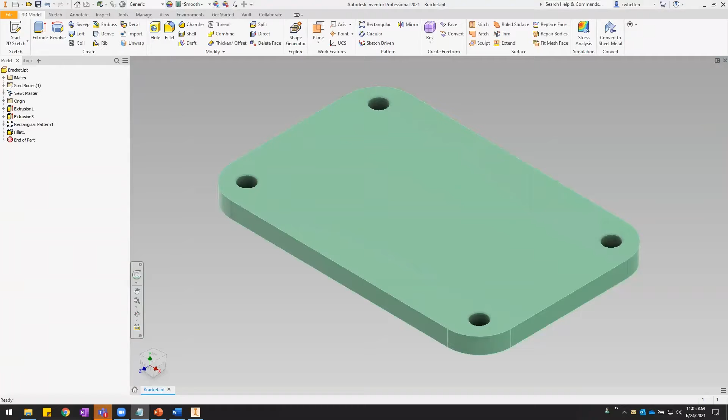Okay, so what I've got here is just a simple little bracket that's got some iLogic rules in it to change the size. So it can either be small, medium, or large. As it changes, you'll see the length Z and the length X and the thickness have different values. And what I want to do is I want to have the description display the values of the thickness and the two length parameters as part of the description. And what we're going to do is we're going to write an iLogic rule to automate that description for us.

There's a number of ways you can do that. Obviously, you could export your parameters and use a custom property formatting and that sort of thing. But for today's purposes, we're going to use an iLogic rule to generate our description. So we'll start a rule. I'll just call it description because that's what it's doing for us. And this is a pretty simple thing. We just go into our snippets, go iProperties. There's one for description right there. We just grab that. And then we're changing that.

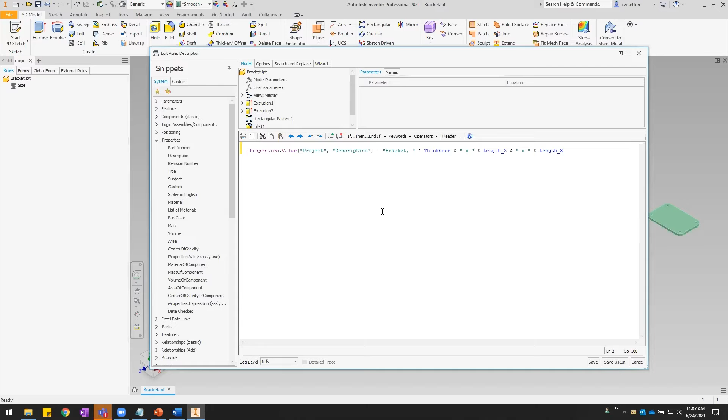We want to set that equal to, and I want to call it bracket. And then I want it to include the value of the thickness parameter. So I'll just put that parameter value there. And then I also want to include the length Z and length X. There we go. Okay, so pretty simple formula. We just save and run that. Go check out our description, our iProperties, and you'll see now it says bracket 0.5 by etc.

Okay, so now let's say we actually want to, instead of just displaying the raw values for these parameters as decimals as they are here, let's say we want to actually format those to be like fractional inches. And again, there are many ways of going about this.

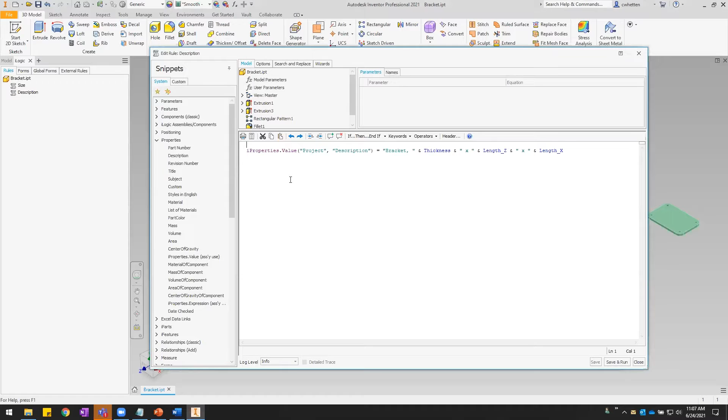One way would be to use the custom property formatting in the parameters dialog, but we're going to just do that through our iLogic rule. And to save some time, I've got a bit of code that I've written up that basically takes that decimal value and formats it as a mixed fractional string. So I'll just copy and paste that code here, and then we'll just talk about it real quick.

We take this value that we want to round, in this case the thickness, and then we specify a rounding increment. So basically to the nearest 1/8 of an inch is what we have specified here. And then this little bit of code down here just takes that decimal value, extracts the denominator and the numerator, does some rounding and dividing, uses the mod function, and then basically builds a string that's a mixed fraction of that. And then we want to take that value as a mixed fraction and use that inside of our description instead of just the raw decimal value.

So I'm going to take that, Control C, paste that there. So I'm going to use that in place of the thickness. So now we're still using the thickness that's being fed into this formula as the value to round. Formula goes through, rounds it, converts it to a mixed fraction string, and then we're going to take that mixed fraction, write it into our description.

Okay. I don't want to spend too much time over that code because that's not really what we're talking about today, but I'll just go ahead and save and run that so you can see the result we get. I'll pull up our description, and there we go. So now instead of 0.5, it now says 1/2. So we want to do the same thing for these other two values here. So let's go back into our description rule.

And one way we could do that is, okay, so we've done this for the thickness. Now we need to do it for the length Z. So we could just take this whole block of code, copy and paste, and then change this to our length Z or length X or whatever. That would be one way to do it. Obviously, it's just going to take a bit more manipulation in order to get this to work, because you'll see we're dimming value to round here, and then we're dimming value to round here. We can't declare two variables with the same name.

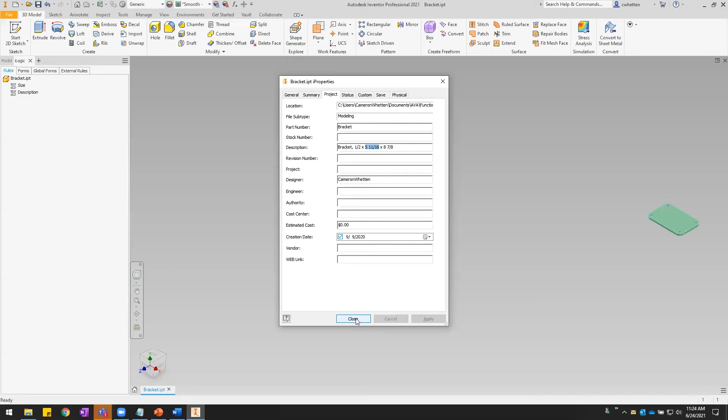All right, we have a few questions here, Cameron, before we move on. One person's asking, does the function always have to have the data type at the end? Whenever you call the functions, it ends with like as string or as decimal—is that always a requirement when you declare functions like that? Yes, when you declare a function, it has to have a value type. It doesn't actually have to return a value, but it does have to be declared as a type.

And this is a great question, it's getting into what we're going to talk about next, which is subroutines. A subroutine is basically like a function, except you don't give it a type at the end because it does not return a value. Interesting. Okay, and we'll talk about that next.

And just to head off this question as well, someone's asking: can you establish a library of functions and subroutines for all sorts of people to access? Yep, these are great questions, we're going to talk about that. We're going to talk about external rules, which is exactly what you're talking about. Thank you.

Okay. All right, go for it, man. Thank you. Okay. All right.

So let's talk about subroutines. I've got a different assembly here, one of the sample sub-assemblies you can download for Inventor. If you go to Get Started and hit Open Samples, it opens a web page with different samples you can download from Autodesk, available for different versions. This is a 2021 example, and it's got a whole bunch of iLogic rules and stuff in here.

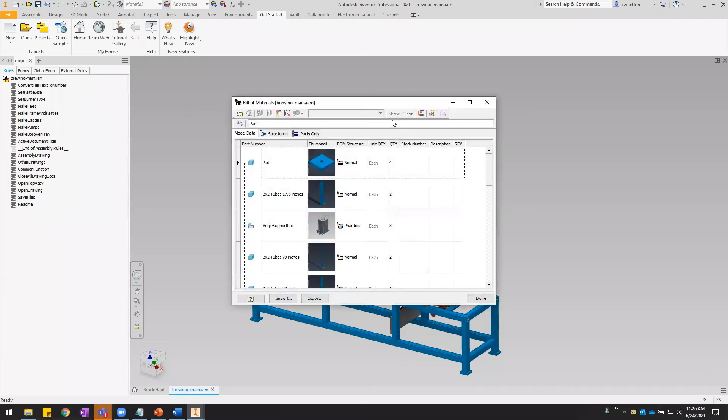But what we're going to do for this one is I've got this assembly, and I'm going to open up the bill of materials. We'll flip through here real quick and see there are several components that have their BOM structure set to reference, and even inside some sub-assemblies there's a couple components set to reference.

What I want to do is write a rule that goes through this entire assembly structure, from the top all the way down to the lowliest part, and basically remove all of those BOM structure overrides so they're no longer set to reference, they'll be set to default. We're going to use this as an example of how to use a subroutine, and we're also going to start talking about recursive subroutines.

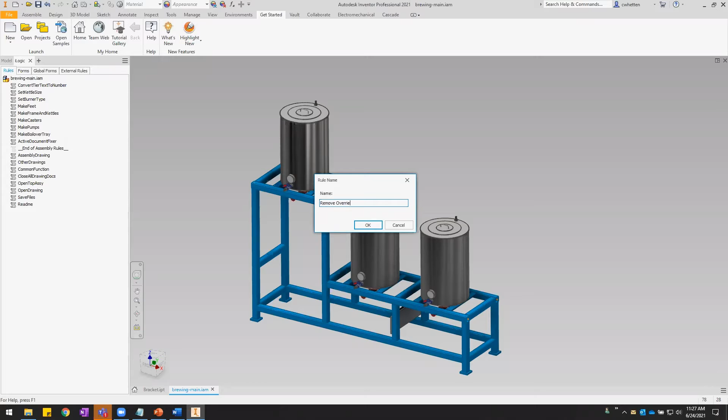So let's just call this remove override - not a great name, but we're going quick here. So, all right.

What we're trying to do here is write a rule that is going to set the BOM structure of all of the components to default. And that's a pretty simple thing to do.

Basically we're going to use a for each to loop through all the different components in this document. I'm going to dim up the assembly document, just for convenience. But really what we're getting at here is we're going to do a for each loop and go through all of the component occurrences as component occurrence in this assembly doc.

Component definition dot occurrences - so all the occurrences in this assembly, we're going to flip through each one of them and set its BOM structure. Comp dot BOM structure, set that equal to BOM structure enum dot k default BOM structure. So a really simple loop that goes through all the component occurrences in this assembly and sets its BOM structure to default. That'll remove any of those reference overrides.

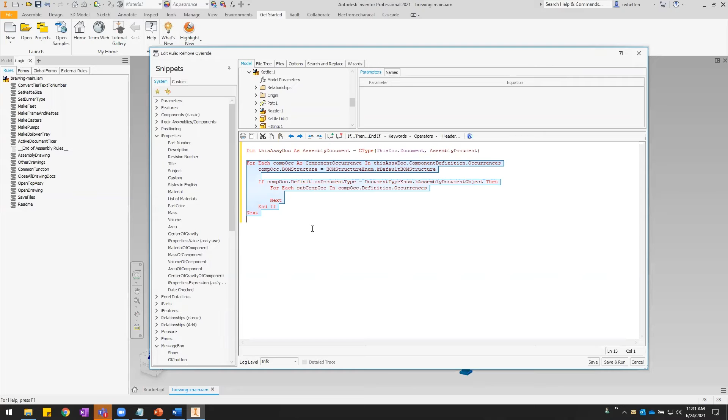Instead, what we want to do is take this function, or this bit of code that loops through and sets the BOM structure, and set that as a reusable chunk of code we can call as many times as we need, just like a function like we talked about in the last example. But in this case, all we're doing is setting the BOM structure. We don't need to get a value back, we're not trying to get some mixed fraction string or anything, we're just performing an action. So we don't need a value back. What we want to use instead is a subroutine, which does not give us a value back. Okay, let's go ahead and set that up.

Just like for the function, we go down to the bottom of our code and declare our subroutine. You use the keyword sub, then give it a name: set default structure, and then pass it any values. You don't have to pass values if you don't need to. If you were just, say, displaying a message box, you don't need to send it any values or get any values back. Then that would work just fine.

But in this case, we are going to be sending it the value of which assembly to loop through. So we need to create a variable here for our assembly document. Let's do that. Because we're doing a sub and not a function, we do not declare a type. That's the difference between a sub and a function: a function, you have to declare a type and can send a value back through that. A sub, you do not declare a type, and you can't get a value back from it.

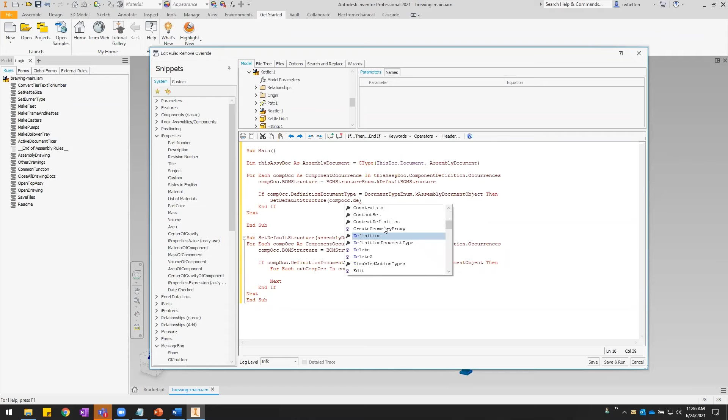So instead, we're going to just call this function now. And the way we do that, just like before, we just call the name of the function. So I'll copy and paste that there. And then we're going to send it the subassembly document. So in this case, that's going to be the component occurrence that we're actually looping through at the moment. We're sending it the assembly document, not the occurrence, so we want to make sure we get the document from that. And the way we do that is go to the definition and then document.

Okay, so now when we run this bit of code, it's going to loop through all the components in the top level assembly and just set it to default BOM structure. And then check, okay, is this occurrence that I'm currently working with actually an assembly? If it is, then we're going to go ahead and run this subroutine, and we're going to pass it the document that represents this current component. Then, because it's an assembly, it's going to loop through all of the component occurrences inside that subassembly and set their BOM structure to default. Okay.

So again, if we just left it at that, then that's going to go through the first level and then the second level deep, and that's it. And if we wanted to go multiple levels deep, we were talking about, oh, we can nest for loops. We don't want to do that. And we got around that here by actually just calling our function. We can do the same thing here. If we want to go into subassembly levels below this subassembly, then we can just call this function again, right? And that's what's called recursive. We're making use of this recursive function. It's called recursion. It's basically the subroutine calling itself, right?

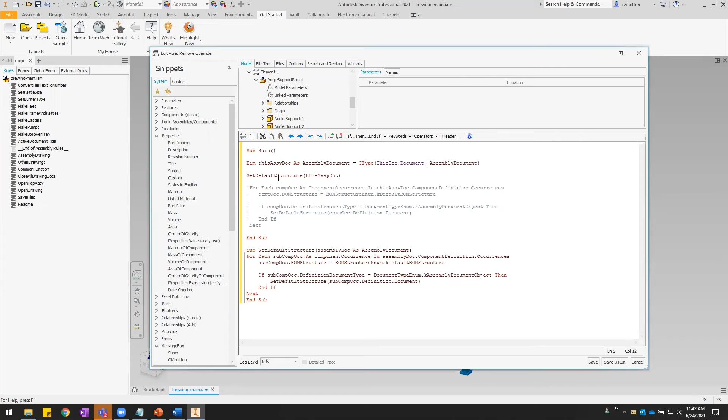So that's exactly what we were doing before, right? But instead of repeating and rewriting those same lines of code, we're just calling that same function, running it through with this assembly doc. It's going to run through, find any subassemblies, throw them back into the subroutine, and just run it over and over again. So we're using the same function over and over again, but at each level of subassembly deep, we're passing it that subassembly instead.

And so it has the effect of just kind of drilling down through the subassembly structure and hitting every component occurrence in the assembly structure that way. Oh, that's pretty neat. Yeah, this recursion is really powerful. It's kind of an abstract concept, and hopefully I've done justice in explaining how it works here. But it's really powerful to be able to do that.

Right. And essentially, anytime you need to go through an assembly structure in an Inventor iLogic rule, recursion is going to be what you end up using. It's going to give you more bang for the buck than trying to predict how many levels deep you go and just writing. That's right. Yeah.

So let's run it. Make sure it actually works. Let's save it first, and then just to review, we'll pull up our bill of materials here, and you'll see components with reference. So there's several components at the top level assembly, and then in this next level assembly down, we've got a couple components there as well that are referenced. And so after we run the rule, those should be set back to, okay, no errors.

Are there any questions on that one, Adam, before we move on to the next? Yeah, we got a few questions going on here. If you could pull up the code again. When you type CType at the beginning of the line declaring assembly document, is it the same as ThisApplication.ActiveDocument? Could you point out the difference there?

Okay, yeah, there's a couple things in that question. So ThisApplication, that's one thing you can do. This ThisApplication.ActiveDocument, that would do the same thing. It would get this assembly document, but it's not quite the same thing in how it works, right? This would actually get the active document, which would be fine for this rule. That would just work just fine.

But let's say you're running a complex rule that's maybe opening up a drawing and making some changes there, or flipping over to another subassembly or something and doing some stuff there. Then your active document is actually changing. And so if you're using this code and expecting to get the top level document, but you've actually switched over to another document, you're going to get a different document back than what you expect.

And so you're going to get unexpected results from your code. So I tend not to use active document unless that's specifically what I'm going for. Instead, I use ThisDoc.Document, which gives me the document that this rule lives inside of. And so I know regardless of what the active document is, this document is always going to give me this assembly document. Right. Okay. Yeah, so that's like more specific to what you're actually working on. Yeah. So there's a difference there.

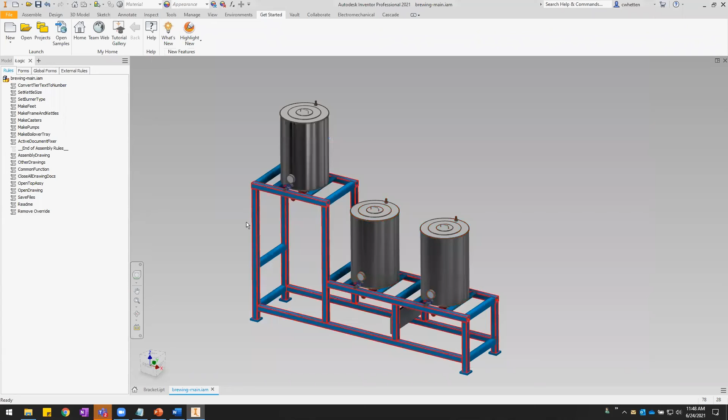And also, this assembly is just, like I said, a sample set that you can try stuff on. The components that were set to reference, I did that manually just for testing this code. If you would download this sample set, those components won't be set to reference. But like I said, I just did that manually, by just going through here and picking some components, right-clicking, go to BOM structure, set them to reference.

And then I think this question might be a bit beyond the scope of the session, but the same kind of idea behind recursive subroutines, can I possibly apply that same idea to item masters in Vault? We have someone asking, for example, if you wanted to go through an item master and look for all associated PDFs. I think that would be maybe a Vault side thing specifically, but can you comment on that? Yeah, I mean, you can use that kind of recursion if there's ever any kind of nested tree structure that you're trying to go through.

Then that recursion, you can use the same concepts to, in this case, we're doing it to specifically set a property, right? But if we were just going through to read a property, you could do the exact same thing and just say, okay, go through each component occurrence and tell me what its name is, or something like that. As long as you've got some kind of a nested collection of objects, then you can use the same concept to go through it.

So yeah, I would imagine something similar like that would work if you get access to those item objects through the API. And is that like a Vault API thing at that point? Yeah, right. Definitely. Okay, yeah.

So that's a good question, Claudio. Thanks. And we can definitely talk more about that if you're curious. We'll probably have to connect offline though. And I don't mean to interrupt you here, Cameron. You had one more topic I think you wanted to cover here?

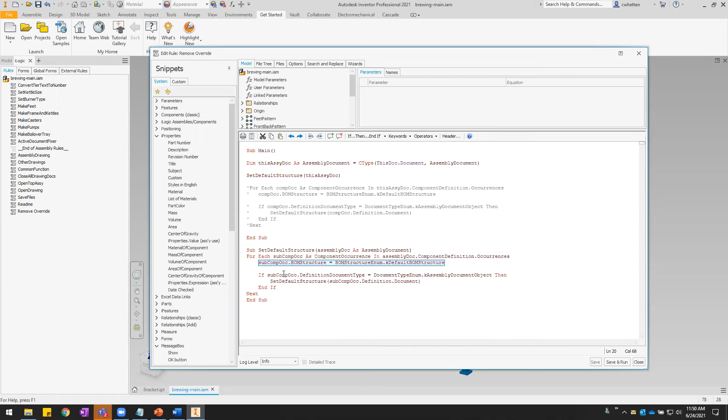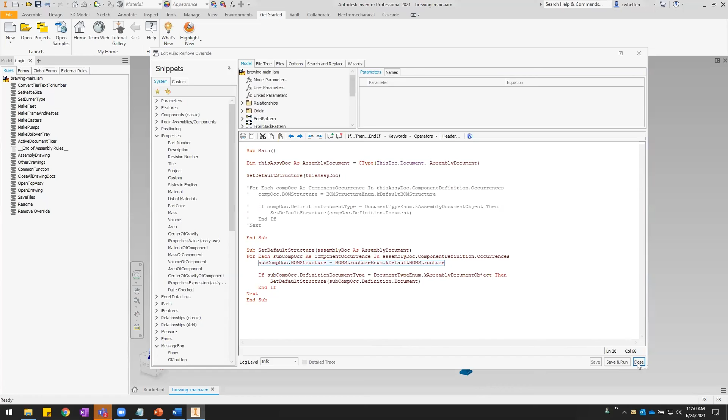Yeah, I want to talk about external rules. So let's talk about that. Give me a second here to get my notes. All right, so we're going to switch back over to the bracket part. And so this description code that we were working through, basically taking a decimal value and getting the fractional equivalent of that, that's something that could be useful not just in this part document, but a lot of part documents, right? This is something that could definitely be useful across all of your parts.

But right now, we've written this iLogic rule in this part. This is the only part that has access to this useful bit of code right here. So the way we can make this available to other components, like was suggested in the question earlier, we can make this an external rule that basically does the same thing as what this function is doing. An external rule is an iLogic rule that instead of being saved inside of this document, is actually saved not in any Inventor document. It's its own script file, like a text file, essentially, that gets saved on disk.

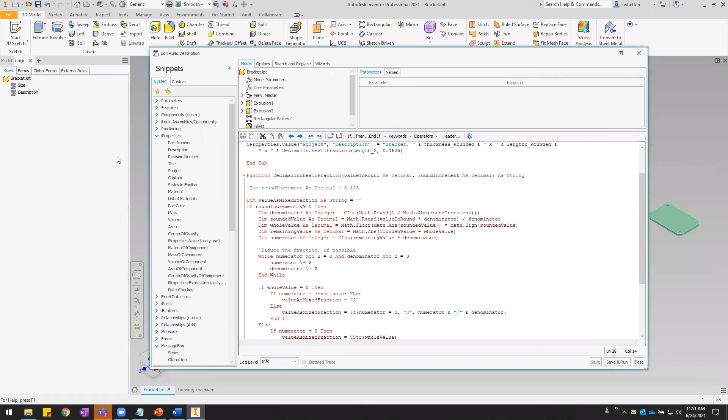You tell Inventor where to look to find external rules, and then any document you have open, you can go over to this external rules tab, and it'll be listed out. In fact, I've already got the one I did when I was prepping for this AVA, so we're going to basically recreate that one. The way you tell Inventor where to look for external rules is you go to Tools. And then this Options panel right here has a little flyout. If you click on the actual word Options, I don't know why they hid it, but they did, there's this iLogic configuration option.

You click on that, and this is a place where you can set up one or more different external rule directories that Inventor can look in. Any directory you have listed here is going to show up as a folder over here. So you'll see I've got this set up as my AVA folder, functions, today's AVA, and then a subfolder for external rules. So let's go open that up. Here's my AVA folder for today's AVA stuff. There's that external rules subfolder right there. Any script file underneath here is going to show up under external rules. So there's that one there. And we're going to add another one, and as soon as we add it, it'll show up over here and here.

Okay, so that's all an external rule is. This is just an iLogic rule that's been saved in a text file. And then we've told Inventor, hey, this is a place where you can find those. And so it makes it available to any other document. Now, in my case, I'm the only one who can see that because that's on my local drive.

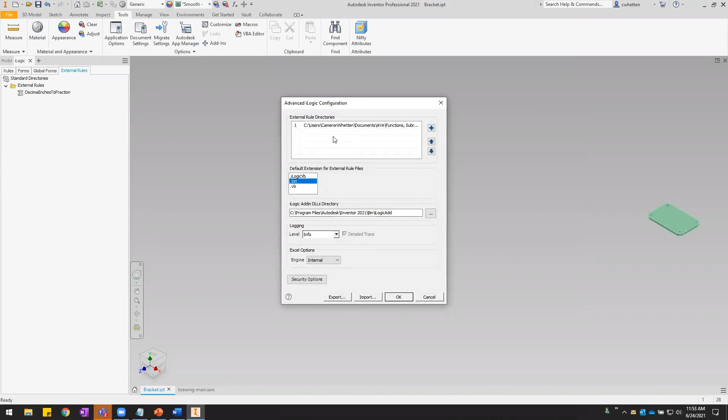But if you wanted to have a repository of external rules that are available to other people in your company, then you could set up either a network folder or a Vault folder, some kind of common shared location. Then anyone who has access to those rules would be able to see them. Each individual user would also need to go into their iLogic configuration and tell Inventor to look at that specific folder. So let's go ahead and make a new one. The way you do that is you can just right click and add external rule.

And this is actually just going to create a TXT file. Well, it doesn't have to be TXT. There's also iLogic VB or just a .vb. But just to keep things simple and to make things easy to read, I just like to use TXT files.

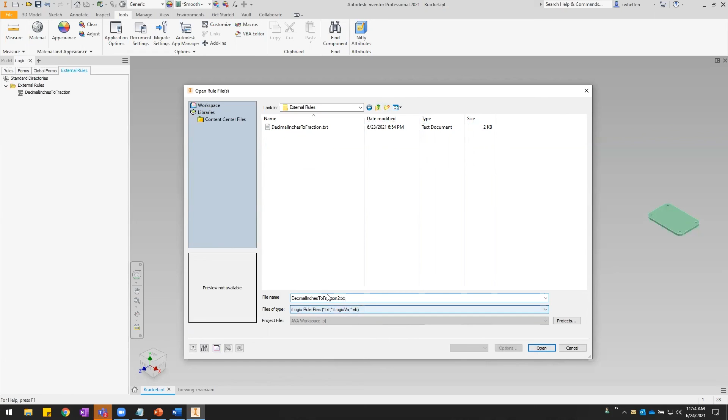So I do want to make sure I'm in the right folder. So I want to go up one, and then go into my external rules. And this is good. Hopefully it won't get too confusing that I've already got one in there, but we'll call it number 2. And then I am giving it .txt to be specific. That's the file type I wanted to use.

And then, am I not creating one? Did I click the wrong thing? Oh, I hit add. So that would be if you have one existing already, you browse to it and then it would pop up there. I want to hit create, my bad. Okay, now it's actually in the right folder. I'm just gonna pick on that and put 2 in the name, just like I did before. There we go. And then, like I said, you do want to specify the file type because it can be any of those 3. So I specify .txt.

So what it does is it creates that TXT file in that folder and it opens up the iLogic editor. And this iLogic editor is the exact same editor you use for normal rules. The only thing that's different is where it's saving that code. For a normal rule, the code gets saved in the file. For an external rule, the code gets saved in the external TXT file.

Yeah, and that's a really popular way to collaborate with this kind of stuff, because once it's in the external rules folder, you could just call them like regular functions in any other rule, correct? Yep, exactly. So that's what we're going to do here. So let's go ahead and we'll save that. And all I want to do is make basically the equivalent of this function here. So I'm just going to copy and paste what we've got going on in here and bring that over.

So I do want that end if. Make sure I grab that. I don't need the return because that's going to work a little bit different in an external rule, and we'll have to talk about that. So I'm going to not copy that over. That return is specific to the .NET function command. So, okay, I'm just going to paste that in. All right, so now essentially this external rule is doing exactly what that other rule was.

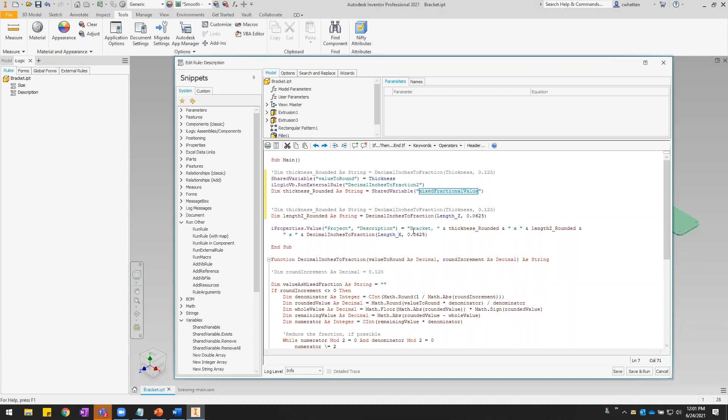So that's the way that I get values to and from an external rule, especially if I need to get values back - it's kind of the only way to do it reliably. Hopefully that makes sense. Sorry, we kind of ran low on time there - I wasn't able to expand on that as much as I wanted to.